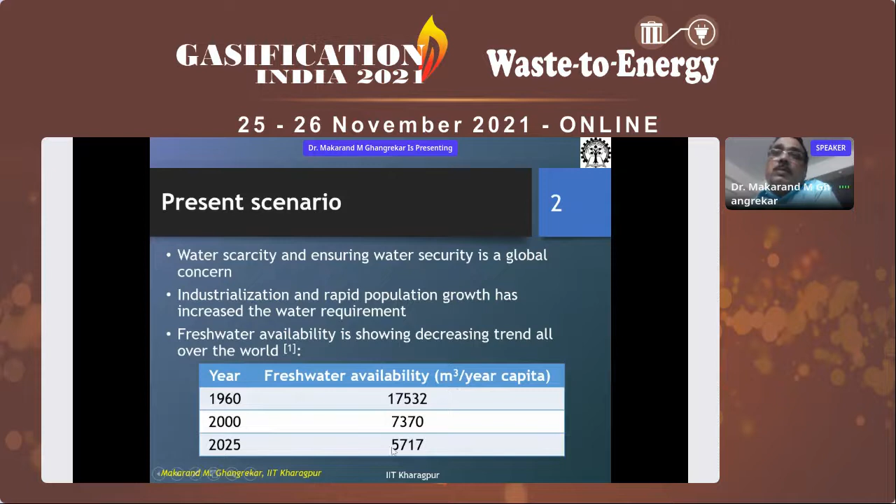Ladies and gentlemen, we are all aware that water scarcity and ensuring water security is a global concern. Our freshwater commodities are getting reduced day by day, and by 2025, we expect that freshwater availability might get reduced to only about 5,700 meter cube per capita. So that is a matter of concern for all of us.

Scientists from their level best are trying to patch up this gap and find out alternative sources of water. Here we consider wastewater as a resource, and if we treat it properly, then we can get assured quality water supply for managing our water demand.

Other than the potable water demand, we can definitely use this water. Even if we treat it properly, as other countries are doing, we can even produce potable quality water out of it, but there may be a social stigma, so I do not want to get into that debate. Certainly, we can produce assured quality treated water for non-potable purposes. For that, whatever primary and secondary treatment we are presently providing, we need to have tertiary treatment in place.

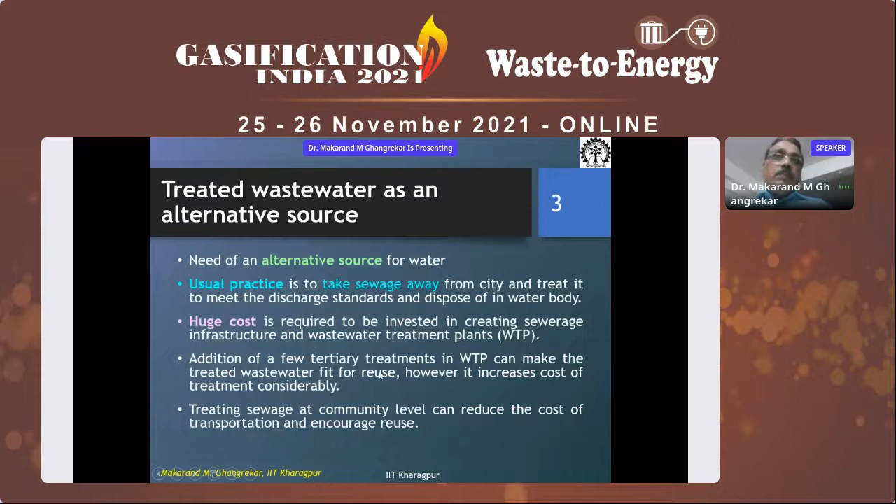Worldwide, RO is being popularly used, but our focus at IIT Kharagpur is to find out alternatives other than RO.

According to the Central Pollution Control Board, about 62,000 million liters of sewage is being generated in this country, out of which only 30% is being treated. Last week, CPCB came up with a fresh report saying that though we have capacity slightly higher than 33% for sewage treatment in this country, only about 18% of the sewage treatment plants are functioning properly. So we really need to look into this scenario and patch up this gap. I'm sure the Government of India is serious about working on this.

When we talk about municipal wastewater, it majorly contains organic matter, nutrients, and suspended solids. So we are right now planning for removal of these three pollutants, majorly, apart from the pathogens which are there.

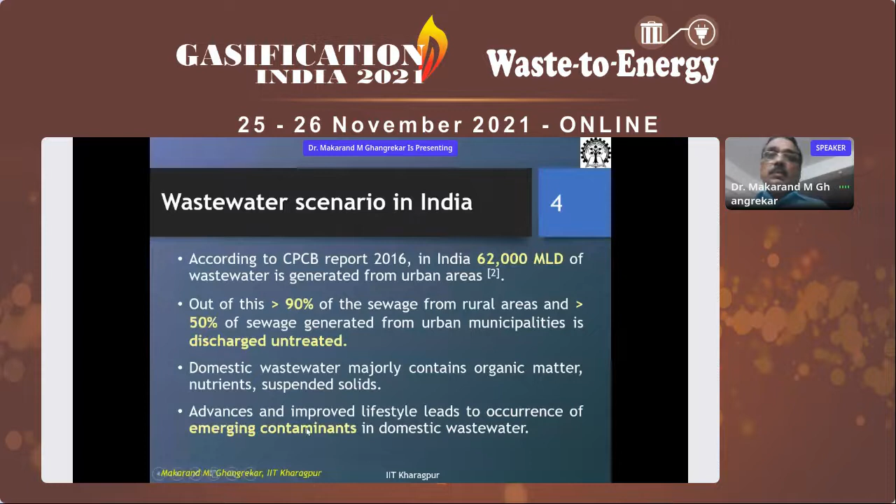However, the concern that is getting shifted now is the presence of emerging contaminants. While utilizing water, we use personal care products. Then antibiotics we consume—about 60% of that goes into human excreta and finally joins the water body. And insecticides and pesticides, though used meagerly in houses, also appear in municipal wastewater during subsequent floor washing. This is a concern because, though at low concentration, many of these compounds are endocrine disrupting compounds, and hence are a matter of concern.

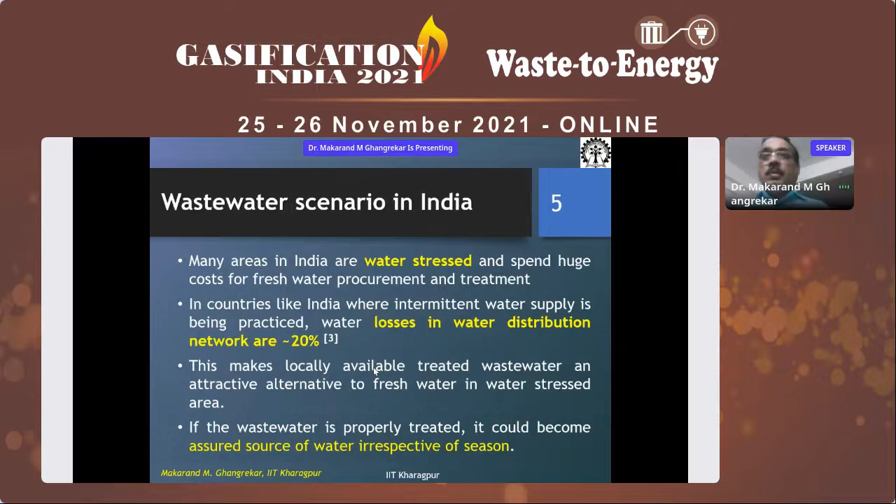We are aware that many areas in India are water stressed and spend huge costs bringing water from larger distances, and during transportation and distribution itself, 20% water loss occurs. So that opens up a window: if localized sewage treatment plants are planned, then we can minimize this transportation cost of water, and assured water will be made available for fulfilling many other non-potable uses in the locality.

Like many cities in summer, we don't have water for maintaining greenery or aesthetic enhancement of the city, and they get dried up. So at least this water can be made available, and for many other uses for that matter.

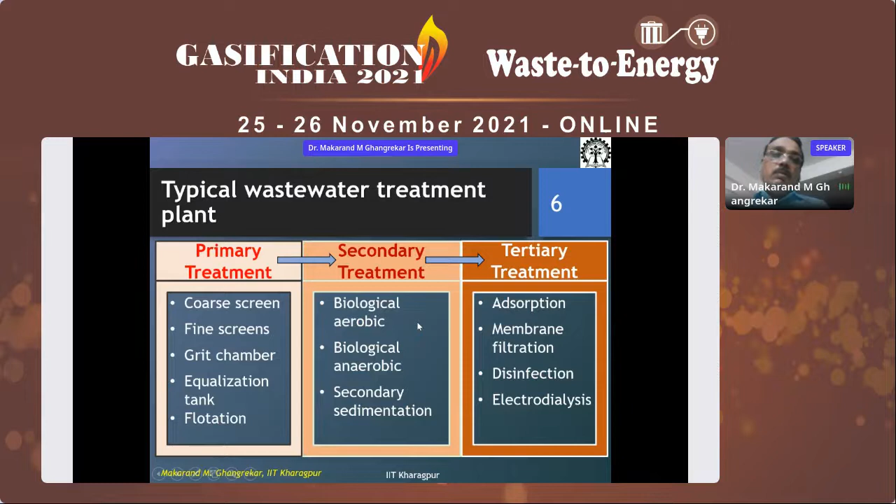A typical wastewater treatment plant comprises primary treatment, secondary treatment, and tertiary treatment. Primary treatment is meant for removal of coarser, settleable, floating and settleable organic as well as inorganic solids. Secondary treatment is meant for removal of colloidal and soluble organic matter. And as per the targeted reuse needs, we need to have a tertiary treatment in place.

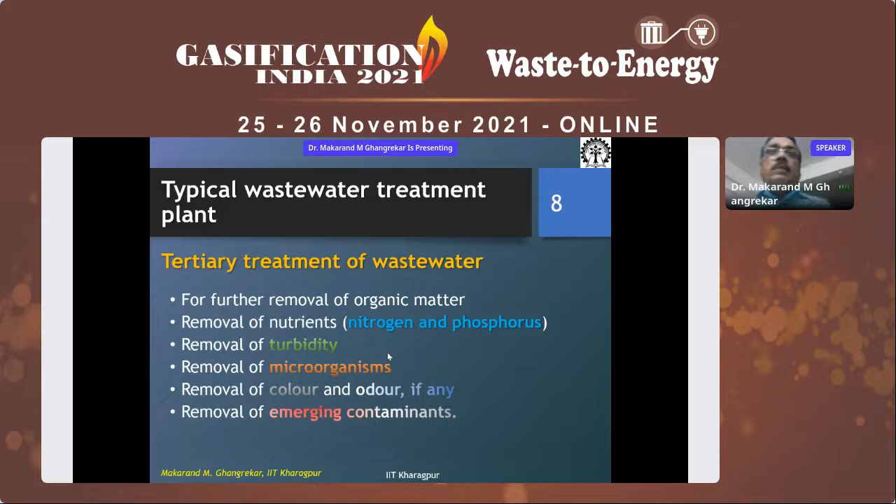Secondary treatment also involves management of the sludge generated in the biological treatment. However, this secondary treated effluent will not be of reusable quality, and it needs further tertiary treatment for removal of organic matter, removal of nutrients such as nitrogen and phosphorus present in municipal wastewater, and further removal of turbidity to increase its visible acceptance.

Secondary treatment contains about 10 raised to power 4 to 10 raised to power 5 coliform number per 100 ml. Part of them are pathogenic, so that needs to be reduced considerably, and fecal coliform should be brought to zero. Then removal of color and odor.

There may be some residual muddy color if organic matter is present in a higher concentration, so that needs to be removed. And because of the presence of organic matter itself, there is odor.

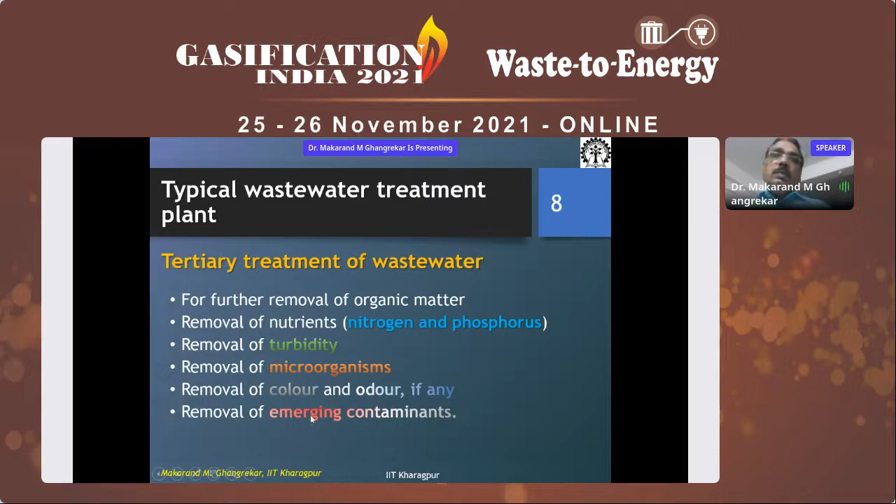And now we are showing concern to manage and get rid of these emerging contaminants. Even at the low concentration of microgram per liter, they have an adverse effect.

In days to come, we are bound to adhere to this standard, so that the water quality in the receiving water body can be protected, and water can be used for recreational purposes. We are aware that many of our river stretches are not even safe for recreation, forget about being accepted for potable purposes. So we need to adhere to these standards in the days to come.

Though they are bringing down BOD to 20 or 30 milligram per liter, even that presence of 20-30 milligram per liter of BOD or 50 to 100 milligram per liter of COD makes water unfit for various other uses. For municipal wastewater, typically the odor can be removed once the organic matter and the sulfur-bearing compounds are removed from that wastewater.

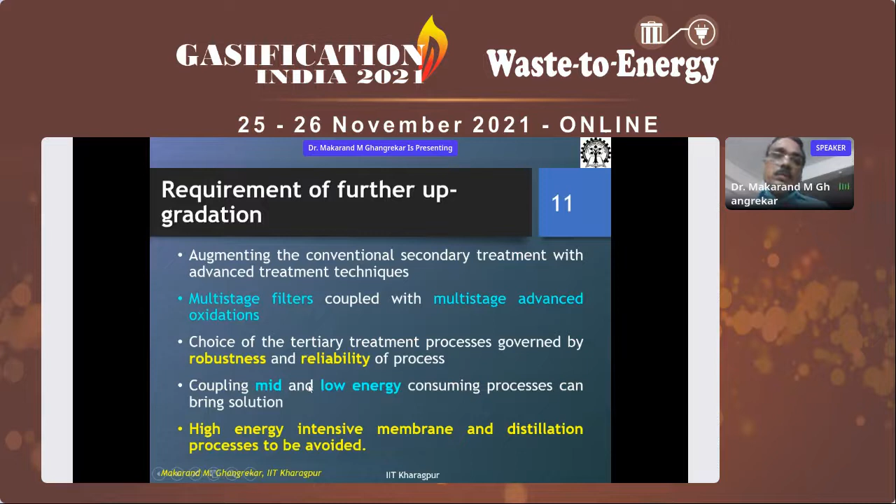So this way, if we produce treated water at 40 rupees cost, there will be less acceptance. Hence our major focus at IIT Kharagpur is to couple mid and low energy consuming devices and processes, so that we are able to produce treated wastewater at affordable cost, imparting sustainability to sewage treatment, so that reusable quality treated water can be produced to reduce the stress on freshwater demand.

In general, what we can explore is an algae-based process, so that harvested algae can be used as a biomass for biofuel production. This is being practiced in many countries at full scale now, and even in India, many are researching, and a few pilots have come up.

We can recover electricity using technology like microbial fuel cells, which I will cover in my follow-up presentation. Sewage sludge can be explored for biochar, hydrochar, or activated carbon production, which can be used back into the process for tertiary treatment, and surplus biochar can be sold for other industrial applications.

We can explore anaerobic treatment technology for methane recovery. The treated water can be explored for aquaculture, which will also fetch additional revenue. Or using concepts like microbial electrosynthesis, there is scope to produce different synthetic compounds.

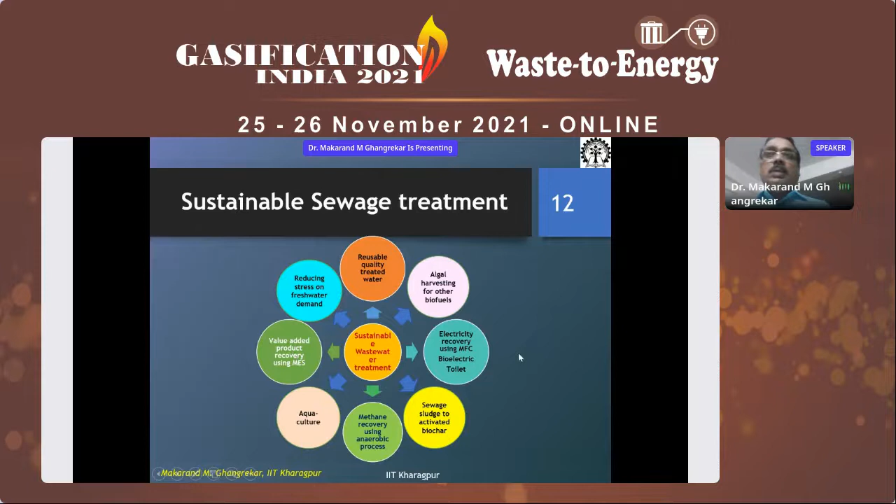As I said in the introduction, these technologies are still at bench scale and will require some time to mature. But scientists are working on it, and I will touch upon this during my follow-up presentation.

From here onward, mostly I will be sharing the work we have done at IIT Kharagpur. We have a UASB-based upflow anaerobic sludge blanket reactor type sewage treatment plant, which I constructed through project funding received from the Department of Science and Technology and the European Union. This is designed for handling 400 cubic meters per day of sewage.

One peculiar characteristic of this UASB reactor, for those aware of it, is that while treating low strength wastewater, granulation of biomass is difficult to obtain. Whereas our UASB reactor treats sewage generated on campus, where per capita water use is much more and the sewage is diluted, with average COD of 222 to 230 milligrams per liter. Even treating such low strength wastewater, we have two-thirds of the biomass present in the UASB reactor as granular biomass. That is one indication of successful operation of the UASB reactor.

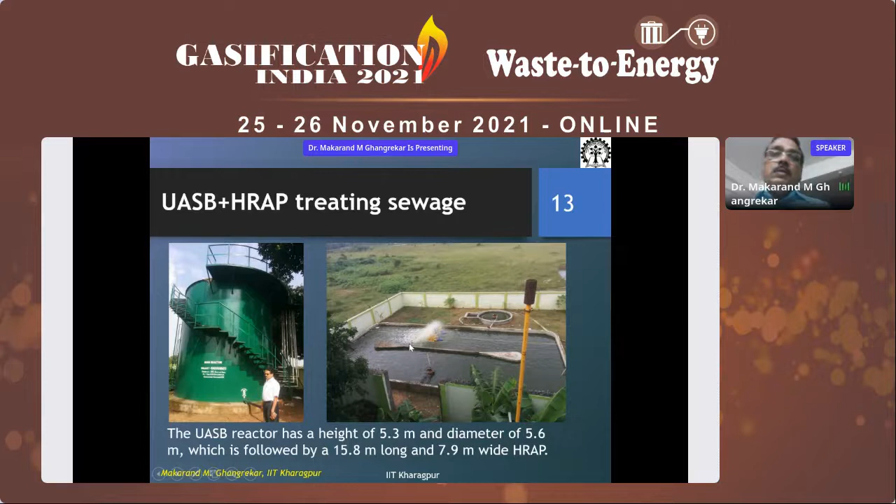After the UASB reactor, the effluent is treated in a high rate algal pond. The high rate algal pond produces synthesized algae, and that harvested algae can be used as a feedstock for biofuels. These are still on an experimental basis, and we are exploring different value-added products recovery at IIT Kharagpur.

So this is the performance of the UASB reactor. When we commissioned it, unfortunately we started in the winter, so it took a longer time for commissioning. But 2 to 3 months of commissioning time is normal even in summer.

If we start to build up the necessary biomass inside the UASB reactor, it takes about 2 to 3 months. In our case, it took more than 4 months, and once it stabilized, it started giving 70% removal efficiency for total COD, and even in peak summer, we could touch upon a few days even above 80% COD removal efficiency.

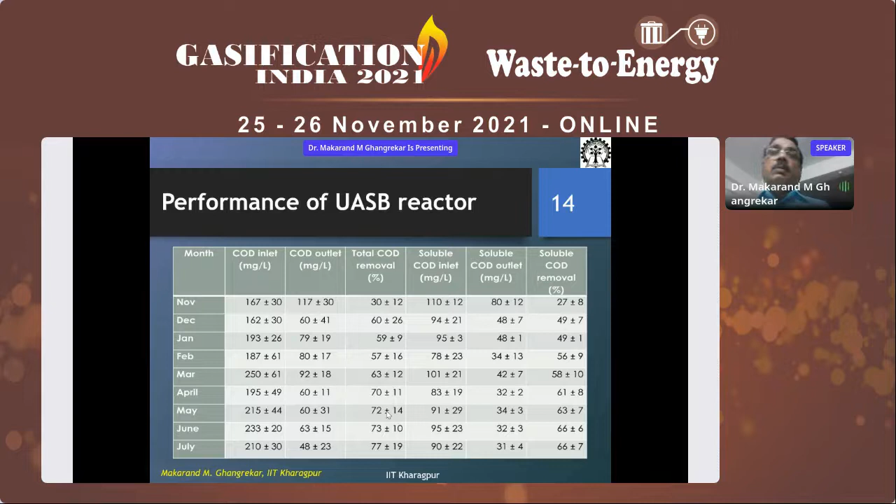In India, we have about 40 plus UASB reactors treating sewage, and most of them are struggling to give COD removal of about 60-65%, with BOD removal around 75%. Our plant is giving more than 80% BOD removal, and even in winter, the total COD removal is somewhere around 68 to 70%. This is possible because of proper design and biomass granulation in the UASB reactor.

In a way, we are able to recover methane, but right now we are not utilizing it - we are still working on it. This plant has been in operation for 4 years. I'm trying to catch hold of some partner who can really utilize that methane, at a low scale of 30 cubic meters per day, for beneficial use. Right now, we are only flaring it with the flare stack. But still, we don't have to spend energy for the treatment of wastewater, and that makes this treatment economical.

The role of the high rate algal pond is to further give polishing treatment for organic matter removal and remove nitrogen and phosphorus, which the UASB reactor, being anaerobic, fails to do. It also contributes to reduction of pathogens.

It produces effluent with removal of 85% of nitrogen, more than 90% phosphorus, and 2 to 3 log scale reduction in pathogens. It produces effluent with less than 30 milligrams per liter of BOD, COD around 80 milligrams per liter, and pathogens around 600 MPN per 100 ml.

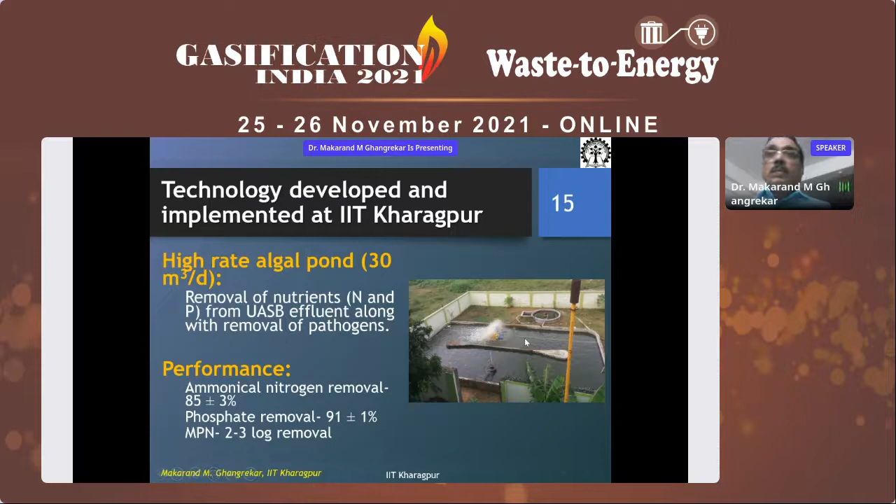So this water is suitable to be used for restricted irrigation, meaning where human beings are not supposed to be in contact. It can be used, but it cannot be used for contact irrigation purposes, such as sprinkling lawns, where people movement could occur. So then we modified the design.

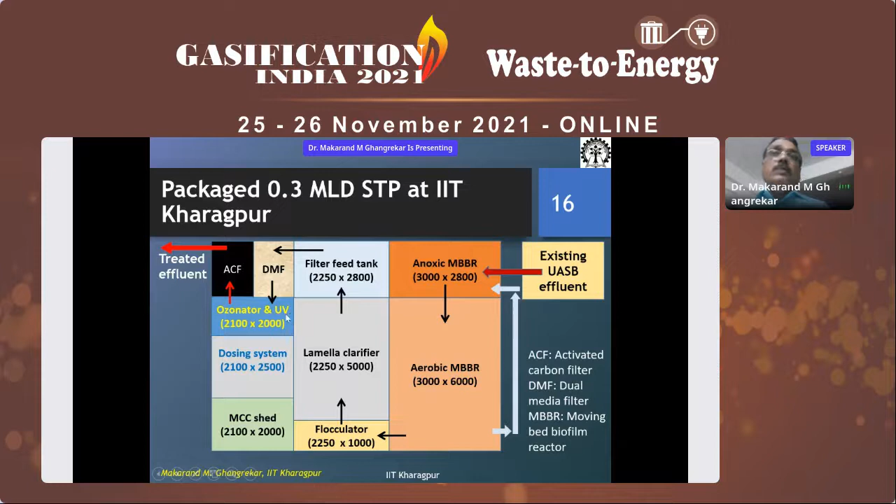To give polishing treatment, we set up about a 300 cubic meter capacity per day modular sewage treatment plant comprising a moving bed biofilm reactor, anoxic and aerobic, so that the combination can remove nitrogen, then a lamella clarifier, then a dual media filter, followed by three-stage disinfection comprising ozonation, ultraviolet disinfection, as well as chlorination as per the need. The final effluent is passed through an activated carbon filter to remove any disinfection byproducts that are formed.

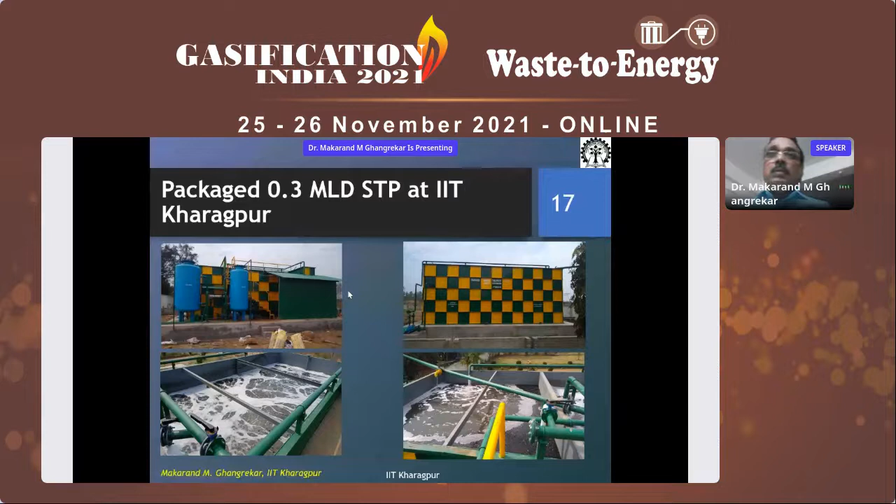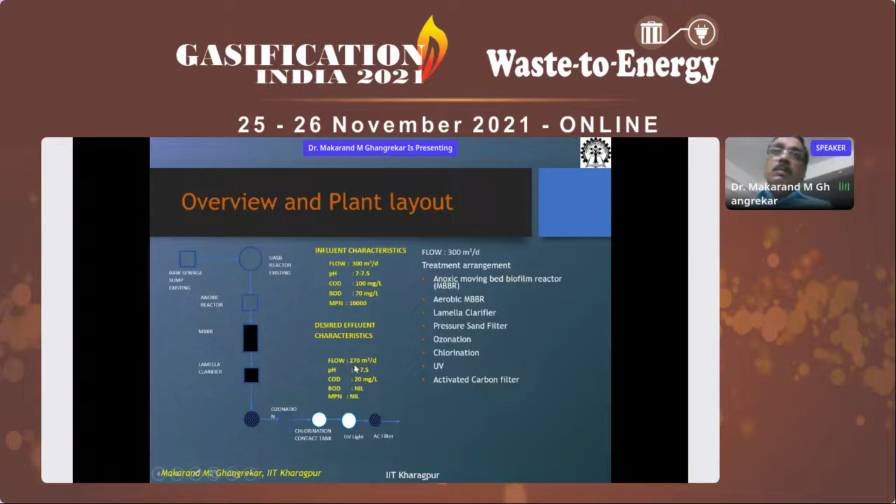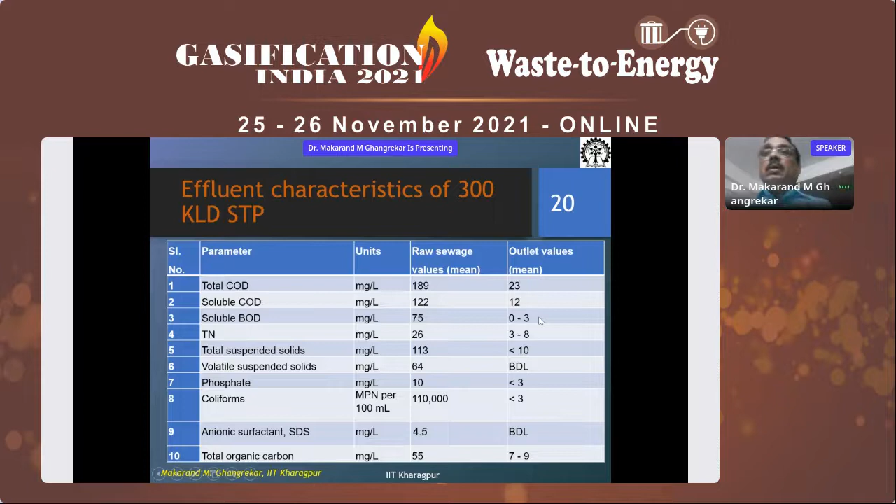So this water is really safe, and this quality is much better than the water quality available in many natural river stretches, which we are accepting as raw water for potability purposes. So this concept we further...

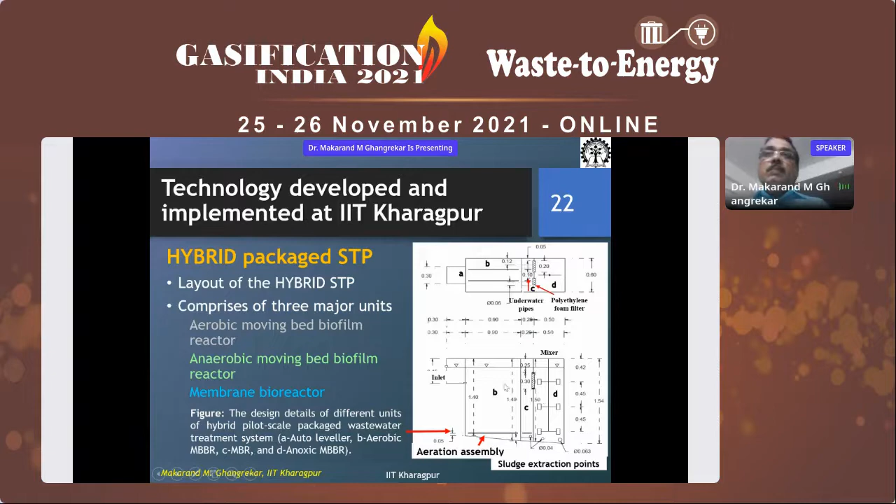Moved it to the package treatment plant of 3 cubic meter per day. Instead of the lamella clarifier, which is bulky, we replaced it with a membrane bioreactor. So it's a combination of aerobic MBBR, anaerobic MBBR, and membrane bioreactor. This compact module that we prepared also gives more than 90% COD removal efficiency, close to 96% BOD removal efficiency, and even total nitrogen removal efficiency around 80%.

MPN without disinfection is brought down to less than 300 MPN coliform per 100 ml, and even surfactant removal is effective. So this package treatment plant is also effective to produce treated sewage meeting the NGT recommendation. But if we want to reuse it for human contact purposes, some moderate disinfection by addition of bleaching powder can be done to produce water safe to be used in horticulture.

This is the costing of this plant. This package plant of 3 cubic meter capacity took 2.16 lakhs as capital investment. Operating cost is 5.6 rupees, and considering 15 years life of the reactor, the capitalized operating cost comes around capex of 21 rupees per kiloliter. So because of the smaller size, it is a little costly.

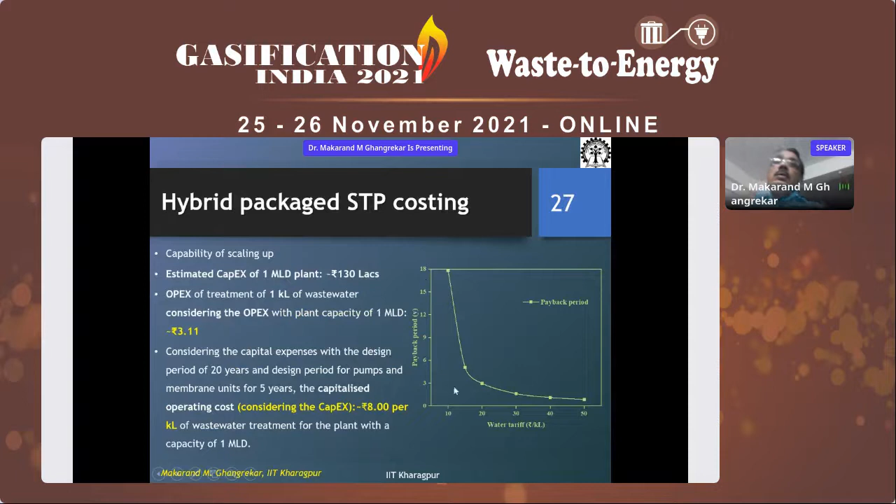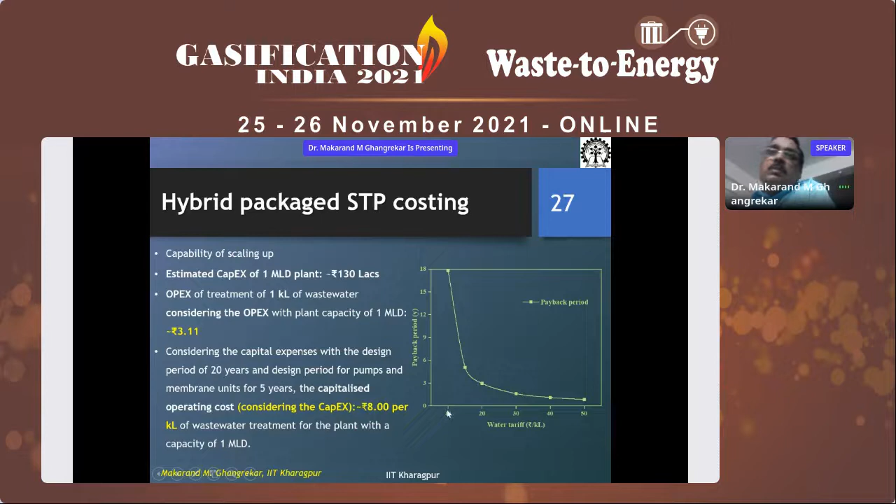The return of revenue also depends upon the water tariff. Obviously, if the water rates, as in many metro cities in India, are more than 15 rupees per kiloliter, there is definitely a revenue return. But if it is less than 10, then obviously there is no benefit if the water charges are less than 10 rupees per kiloliter.

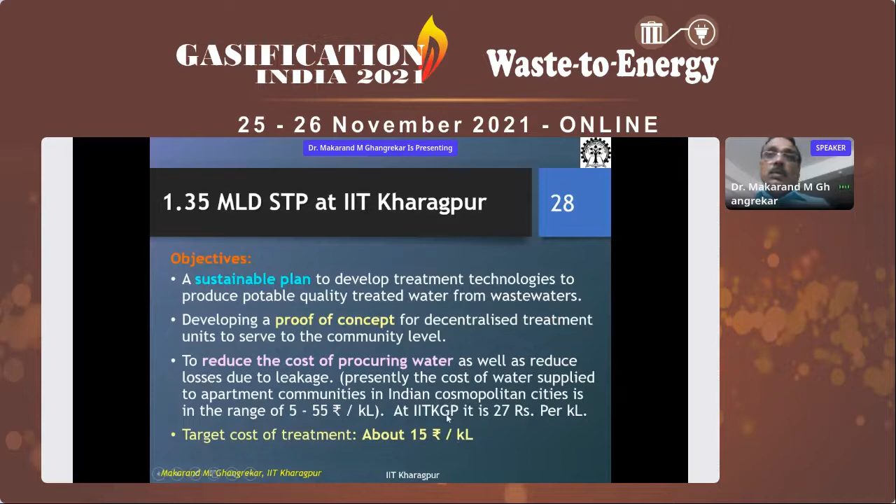We extended this concept on campus to a 1.35 MLD sewage treatment plant to manage the wastewater generated from the hostels. The target cost that our institute authority gave us is 15 rupees per kiloliter. And these are the plans.

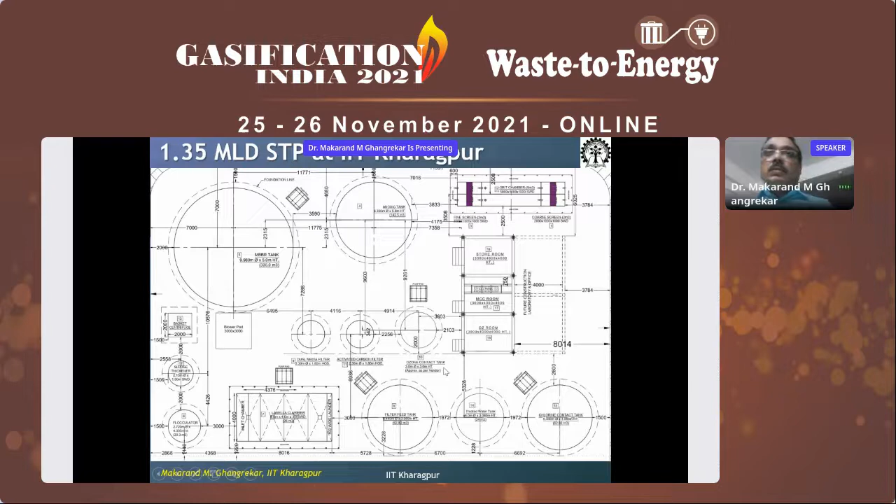After screen grit, we have anaerobic MBBR, aerobic MBBR, then lamella clarifier, dual media filter. Then it goes to the disinfection tank where we have arrangements for ozonation and chlorination. UV we have avoided because from the 300 cubic meter plant we found that UV is not playing much role. So ozonation and chlorination are better.

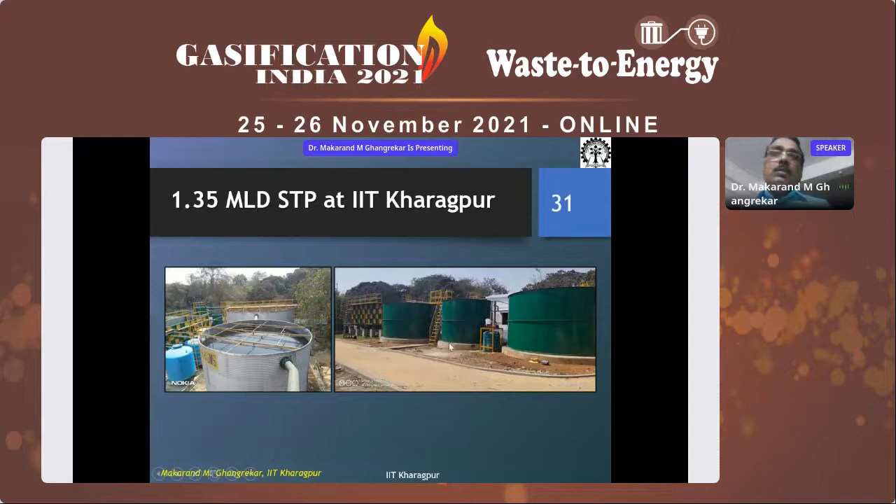This is the photograph during construction, and this is the photograph when the plant construction is complete and put into operation since September 2020. Since then, the plant performance is still improving. This is at the end of October.

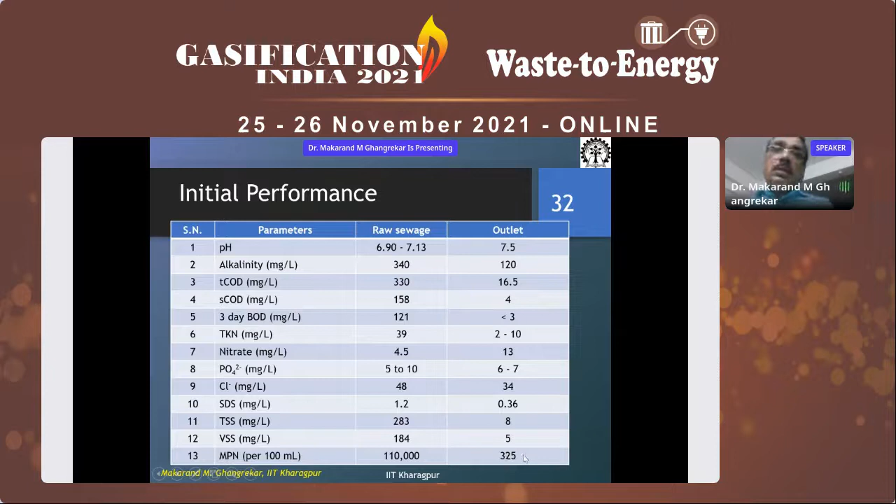Right now we are only dosing ozone, so we are experimenting with ozone. With addition of chlorine, this 300 MPN issue could also be solved.

We then estimated life cycle costing for 300 cubic meter and 1350 cubic meter capacity treatment plants. The cases considered: Case 1 is secondary treatment up to the clarifier. Case 2 adds tertiary treatment with ozonation. Case 3 is ozonation followed by chlorination. Case 4 is chlorination followed by UV, since the presence of chlorine in UV generates more radicals and is more effective in removing some xenobiotic compounds. Case 5 is all of these in place together: ozonation, chlorination, and UV.

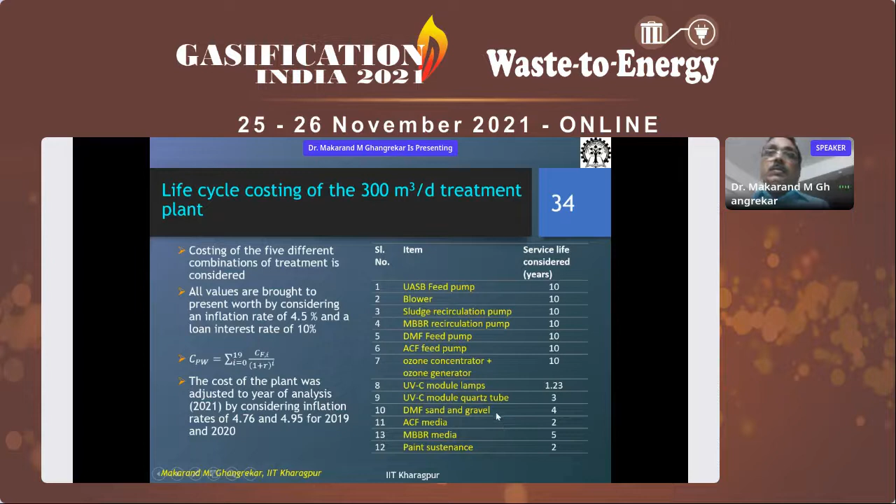I'm not going to go into detail, but what's important is this: the life cycle costing tells us that with only secondary treatment in place, the major cost is operation, i.e. manpower cost, followed by the capital component, then energy cost. Whereas with tertiary treatment in place, energy cost booms to about 40%, manpower cost is 30%, and capital cost is slightly less than 30%. The remaining cost is operation and maintenance, including routine O&M, analysis cost, third-party analysis cost, and contractor profits.

So here are the numbers. For the 300 cubic meter capacity plant, considering the installed capacity of electrical components like aerators and pumps, our treated water cost comes to about 16 rupees per kiloliter, because of the small size. When we extend the same to 1350 cubic meters, we are able to produce water for less than 11 rupees per kiloliter, and this water quality is really safe.

I'm not saying it's for potable purposes, because it still contains traces of antibiotics, and hence as a scientist I cannot certify it as potable water. But I can certify that if anybody by mistake drinks that water, nothing will happen immediately. However, long-term exposure is not good because of the traces of antibiotics present.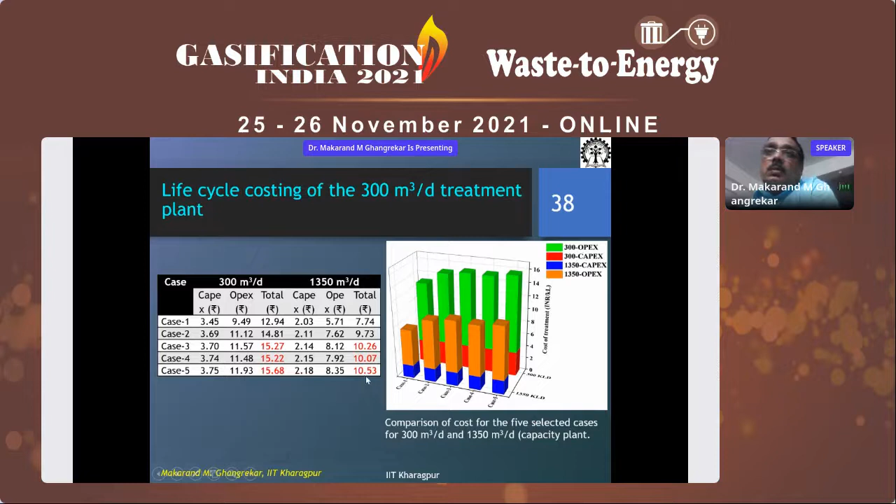Now I will start on our research work on bioelectrochemical processes. For those who are aware, this may repeat, but for those who are new: a microbial fuel cell traditionally consists of two chambers, anodic and cathodic, where respective electrodes are housed. In the anodic chamber, the wastewater to be treated is admitted, and the anode provides the surface over which electrogenic bacteria will grow.

The electrogenic bacteria, when in contact with organic matter, oxidize it and generate electrons and protons. These electrons travel through the external circuit, over which the device we want to power is attached, and through this circuit they travel toward the cathode. The membrane separating the two chambers is traditionally a proton exchange membrane, PEM, which allows only protons to pass through toward the cathode. It should not allow oxygen, since the cathodic chamber is typically aerated.

The PEM should not allow oxygen to cross over, otherwise it will directly consume organic matter for aerobic oxidation. Also, it should not allow substrate to pass over to the cathodic chamber. Those are the expected properties of the PEM. Nafion or Ultrex are the popularly used PEMs.

In this way, the organic matter containing wastewater works as a fuel, and in turn we are able to recover electricity for certain on-site applications. Depending on the calorific value of the fuel, since wastewater is a low calorie material, the electricity harvested is low, and it can only be exploited for powering low power devices such as mobile charging or LED bulb charging, and similar low-demand electrical appliances.

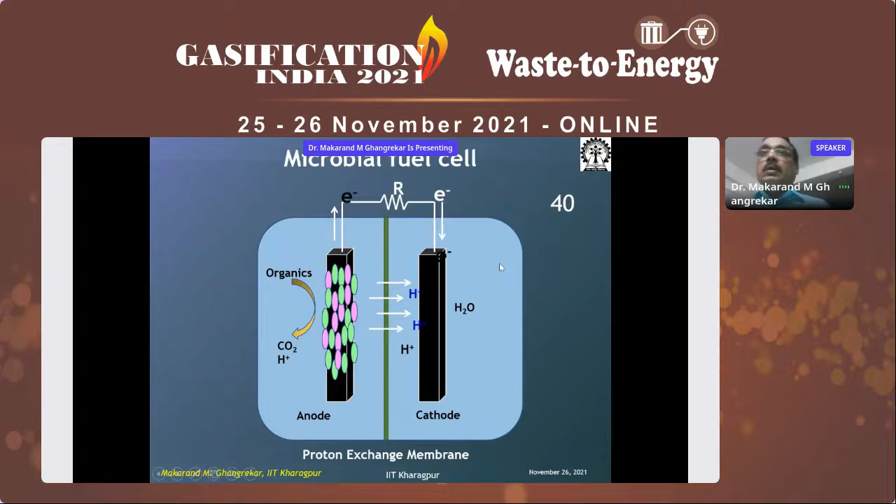So bioelectrochemical system is a general umbrella term. The advantages of BES are as a sustainable green technology for wastewater treatment and generating electricity without any noise and without additional pollution. Rather, it is carbon neutral because we are not using any fossil fuel; we generate electricity using organic waste, converting the chemical energy stored in the chemical bonds of organic matter into electricity.

It has high energy conversion efficiency expected from bacterial mediated reactions, though in reality this is a challenge. We are not getting more than 40% conversion efficiency, while in small lab scale controlled reactors, conversion efficiency may go up to 80%. So electrochemistry and related aspects remain a challenge, and scientists are working on it.

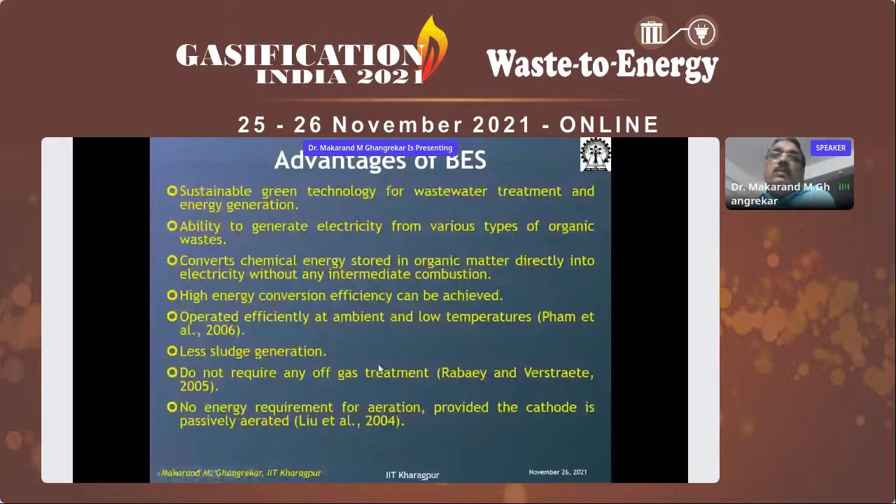Operated efficiently at ambient as well as low temperature, with less sludge production, so excess biomass generation is less. It does not require any off-gas treatment, and no energy requirement for aeration as required in conventional MFC if the cathode is made as an air-breathing cathode.

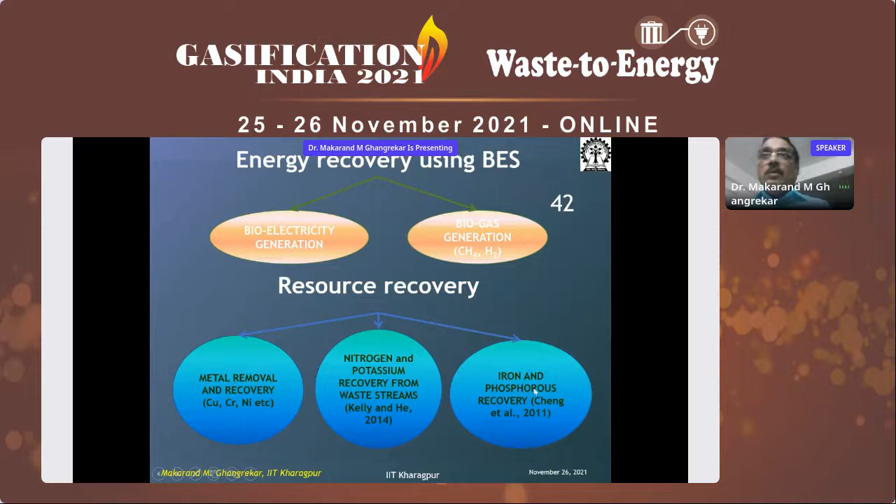It can be exploited for bioelectricity recovery, and for biogas and hydrogen recovery. So we can configure the system to get hydrogen by imposing potential on the cathode. Even methane can be recovered. Then it can be used for metal recovery, nutrient recovery, and even phosphorus and iron recovery, as reported by Cheng et al.

However, there are bottlenecks and challenges since the bacterial mediated electrochemical reactions make electrochemical losses unavoidable. There is activation loss, concentration polarization loss, and ohmic loss while the charge is getting transmitted through the medium. So we need to minimize this as much as we can so that the maximum energy output can be obtained.

Scaling up is a typical challenge because a single MFC, even using the best configuration, can maximum generate 0.6 to 0.7 volt, because theoretical voltage is 1.1 volt, and these losses put together, depending upon the properties of the material components used, will contribute about 0.3 to 0.4 voltage lost in the process. So 0.6 to 0.7 volt by a single MFC.

So we need multiple MFC in a stack. Then there are challenges because of the stack, because of the reversal of polarization potential, which will impose adverse potential on each other. So these are all challenges of operating this system.

Expensive electrode accessories and costly separators, the Nafion and Ultrex, which I was telling about. The Nafion costs typically about 1,800 US dollars per meter square. So that is where it hinders the cost, and the production cost of this device will be tenfold compared to conventional wastewater treatment technology.

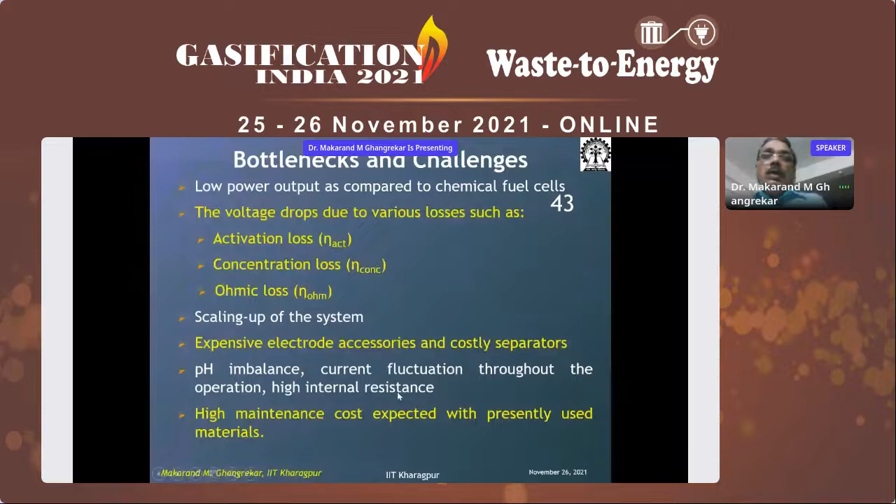Then pH imbalance, like any other biological reactor, is an issue. Current fluctuation will also be an issue. High maintenance cost is expected for this reactor, which could also be a challenge because of the costly components involved.

However, it has various applications in the field of life sciences. One of the applications is, of course, wastewater treatment. It can be used as a BOD sensor. This has already been commercially marketed as an MFC-based BOD sensor.

It can be used for removal of hydrocarbons from polluted sediments. So you insert the anode in the deep polluted sediment, and have a cathode on the surface of the polluted water body, so that in situ remediation of the sediment can happen.

It can be used for generation of power from sediment MFC. This is actually working in Europe now, where they use it for powering environmental sensors in the deep sea. They are utilizing this power with MFC-based sensors, and we experimented at IIT Kharagpur in the aquaculture experimentation pond.

So we installed the anode in the sediments and cathode in the overlaying liquid, and in situ remediation of the aquaculture water without external recycling was feasible, and the water quality could be maintained for long to get the desired success in fish yield in the aquaculture pond.

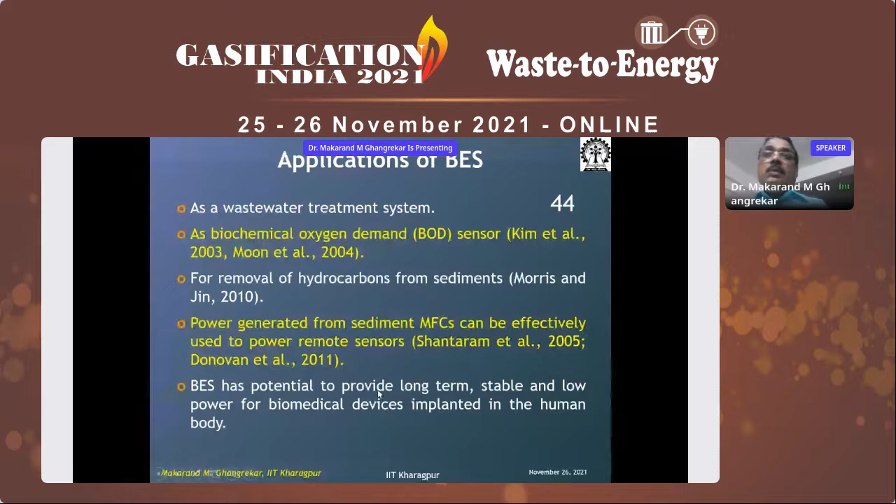BES has the potential to provide long-term, stable, and low power for biomedical devices that we implant in the human body, and even in robots, so that the robot will feel itself when the potential goes down. It can feel that it is hungry and it will eat the sugar cube and power itself.

So that way it can be exploited. It can be used for rapid detection of food contamination. It can be used for sludge degradation.

Our experience in our lab tells us that the MFC based sludge digester requires half of the time required for the anaerobic digester.

It could be used for simultaneous secondary and tertiary treatment of the wastewater - organic matter removal as well as desalination. If we configure the system, that also I will share. So simultaneous wastewater treatment and desalination is possible.

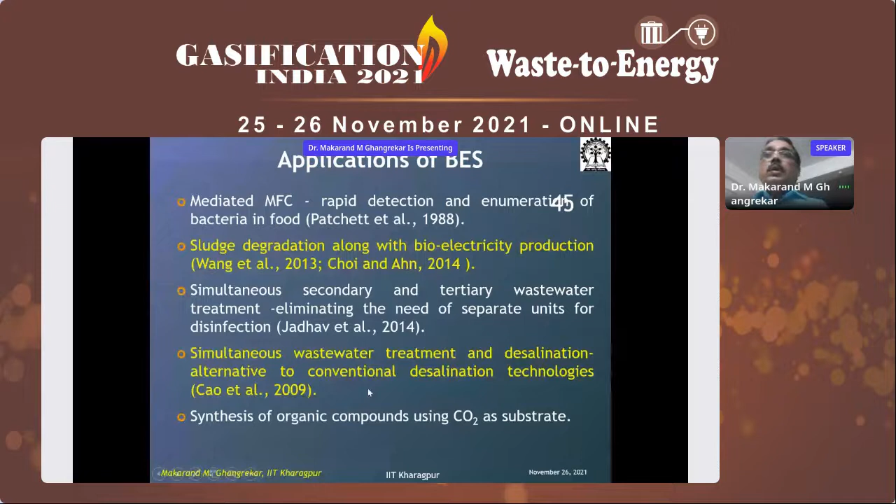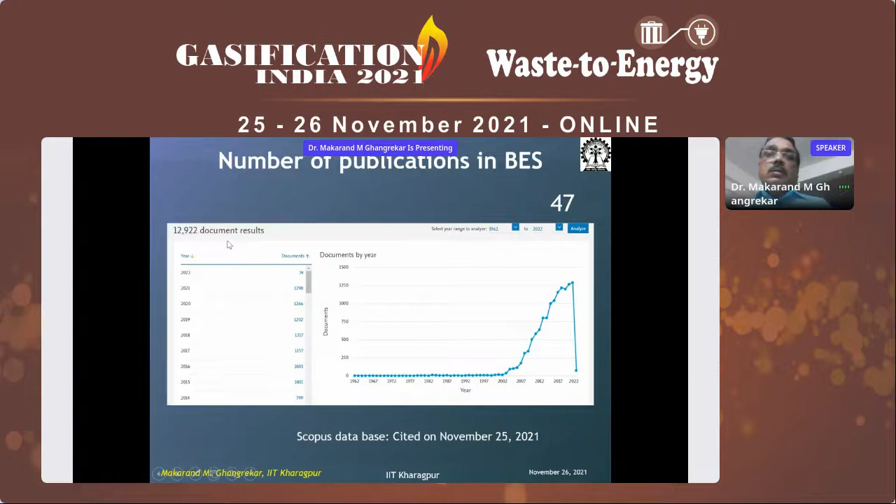This will tell you how scientists are paying attention. When we started research in 2004 at IIT Kharagpur, there were only 21 papers available. At this stage we jumped in, and right now nearly 13,000 publications are available addressing different issues, and this is where we are in this domain of microbial fuel cell research.

We are second all over the world, from our group, after Logan from Penn State University, USA, and then these people from UK, and then again Canada and Chinese people.

Institute wise, we are in the fifth rank for contribution in this domain out of nearly 13,000 to 30,000 papers. We could contribute from IIT Kharagpur more than 200 articles addressing different issues of microbial fuel cell.

Based upon a decade of experience working on different components, we could come up with a 1,500 liter capacity on-site sewage treatment facility. We named it the bioelectric toilet - there is a toilet and there is an MFC-based treatment system.

This comprises a central chamber. This photograph shows it in the horizontal to imagine it better, but in reality it is placed vertical like this. It consists of a central chamber where the waste from the toilet comes in, and then the liquid flows through this peripheral six chamber.

This peripheral chamber contributes further polishing treatment. Half of the liquid flows anti-clockwise, half flows clockwise, and finally it comes to the final chamber where it is operated as an aqueous cathode along with the central inlet chamber.

And we are dosing hypochlorite here - you can see this hypochlorite dosing arrangement, and that generates the treated water. So as and when the toilet is flushed, the waste comes in, and then it gets treated in this chamber within a retention time of a day or day and a half.

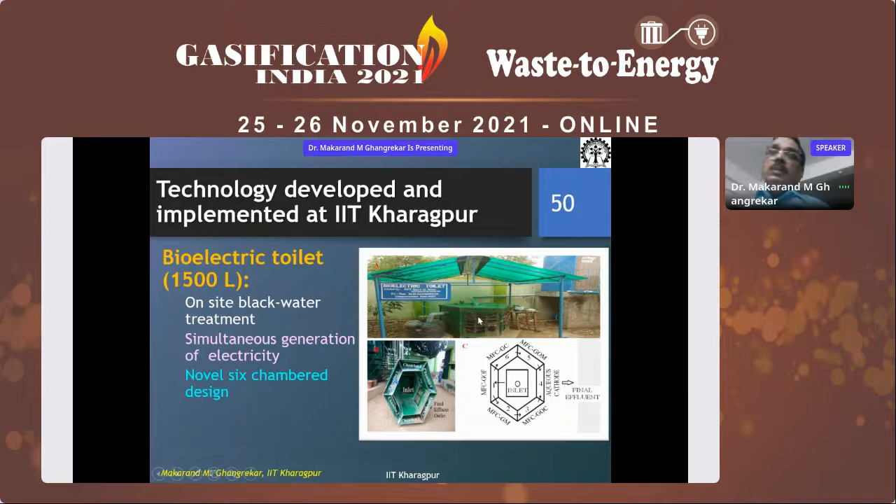So 1 to 2 days retention time, same as the septic tank. But we are able to produce treated water which is safe to be reused for any purpose.

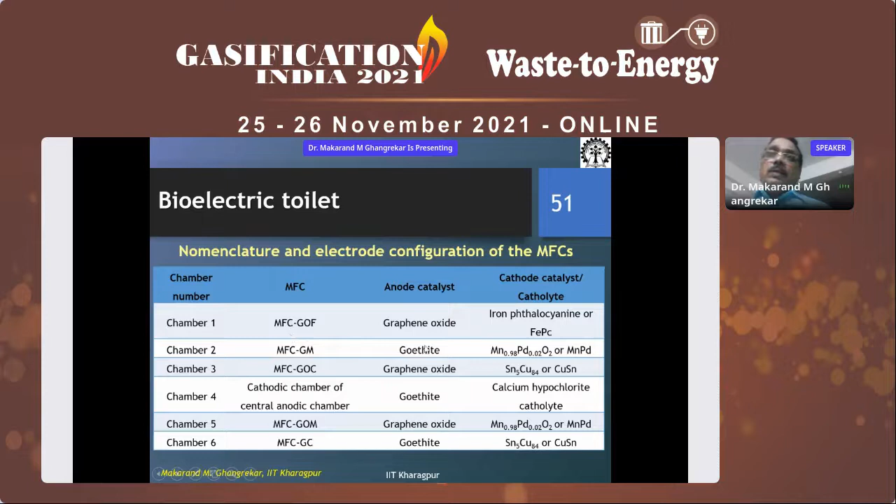Of course, from an electrochemistry point of view, we have used a different catalyst to gain the advantage of better anode potential as well as cathode potential. But these are all low cost materials that we have used.

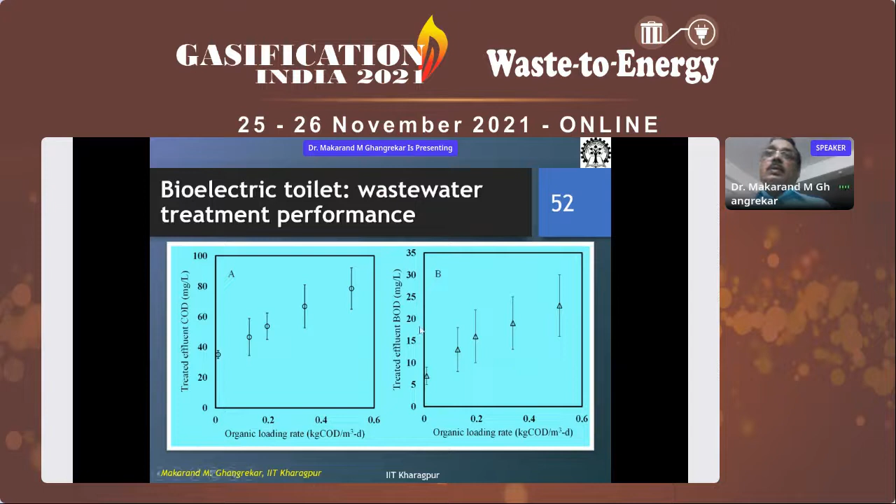This is the performance under different flow rates that we operated. We found that when it is operated for less than 0.5 kg of COD per meter cube per day, we get treated effluent with less than 20 milligram per liter of BOD.

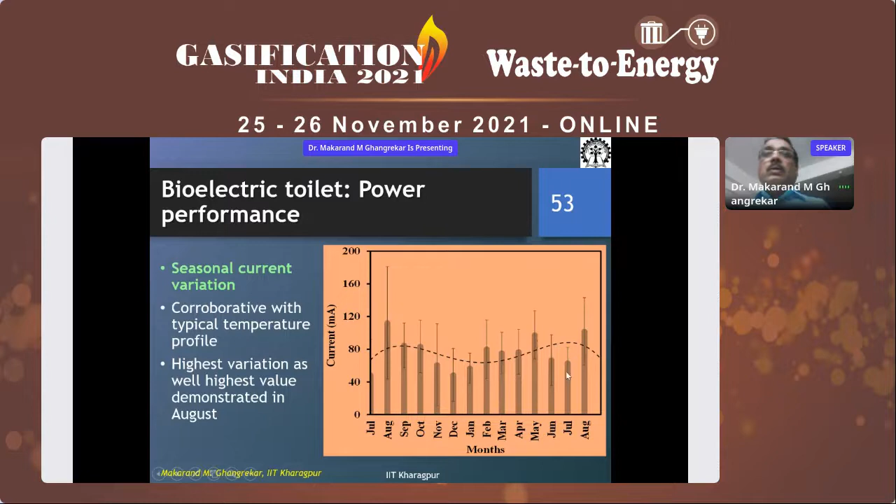This is the variation it has shown over the seasonal variation. Obviously in the winter, the biochemical reaction rate lowers down and its performance slightly drops. In summer or any hot weather, we definitely get much better performance.

Then this electricity - okay, this is the treated water characteristics. Average BOD is around 23 plus or minus 7. COD is less than 80, and MPN is less than 100 MPN per 100 ml.

So this water is suitable to be reused back in the toilet for flushing. Using a solar power pump, we are pumping it to the elevated reservoir over the toilet.

The concept is for a remote area where people are reluctant to use toilets because of the filthy nature of the toilet. If we make this kind of arrangement, once the overhead tank is filled, then every time people do not have to carry huge quantities of water for flushing the toilet as well.

They have to carry only 1.5 liter for cleaning purpose, and when the toilet is flushed on site, this gets treated, and the solar power pump pumps it. In the process, the evaporation loss that happens gets compensated because in India we use water for cleaning - every use of the toilet is about a liter of water. That will compensate the evaporation loss.

So this way it's a perpetual water use toilet - free from any external supply of water, free from any external supply of electric grid, and in the process we are generating electricity. That is the biggest advantage - that electricity can be used for illuminating the toilet premises and cabin at night.

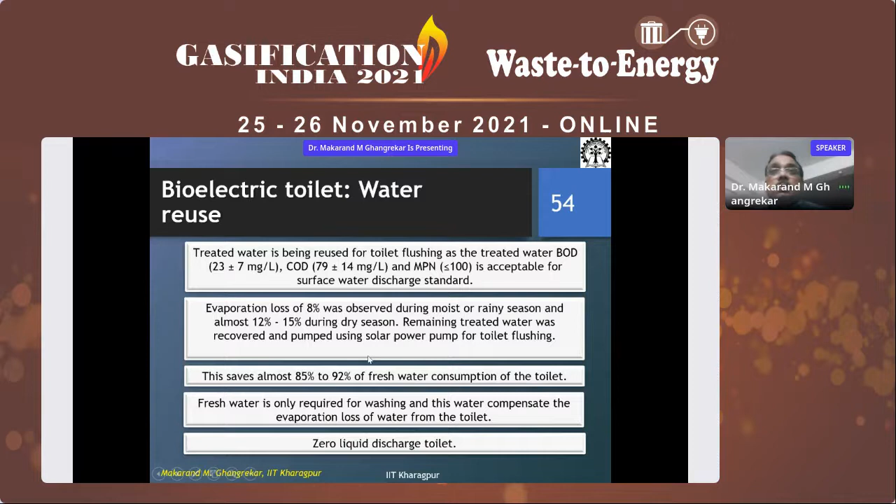Also, the smell problem near the toilet is eliminated because using this bioelectrochemical system, the ammonia is getting oxidized.

Bioelectrochemically, ammonia is converted to nitrogen, so there is no smell issue, and sulfide is also getting oxidized to elemental sulfur. Our students work whole day near this toilet, so there's no smell issue there. The sludge also has better characteristics - C by N ratio close to 20 is needed, and we're getting around 18. The sludge has good value, and we are further characterizing it for presence of pathogens. Upon drying, it can be used as a soil conditioning agent.

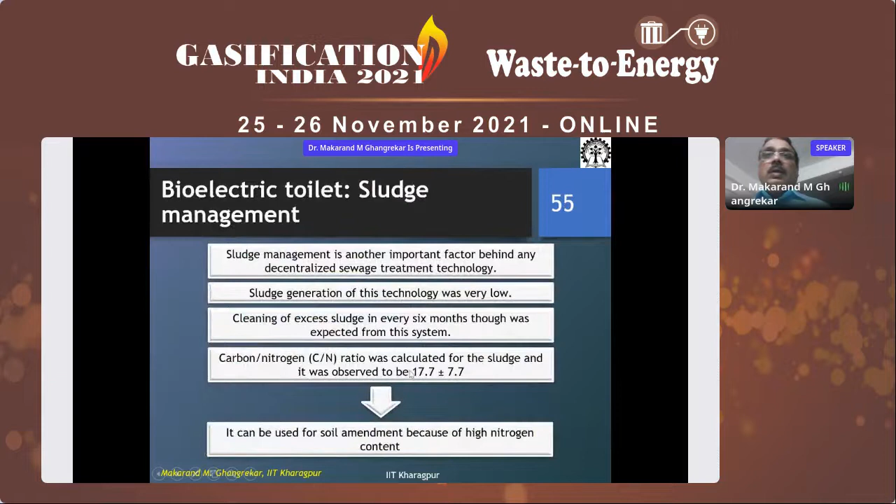So that way this technology can work, but the only thing is the cost. This FRP based system costs about 2 lakhs, but when we make it with the ceramic cylinder, it costs only about 40,000. But then the drawback is the brittle nature - by any chance if anything strikes, the cylinder may get broken. So it needs to be properly protected from animal attacks - dogs or cats should not jump on it.

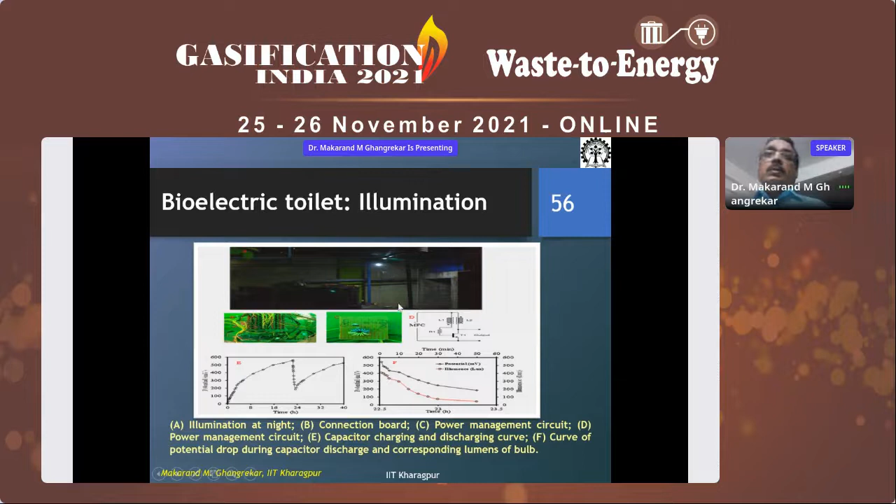This is the electrical circuit with 500 farad, four capacitors that we use to store the power. When required, when the bulb is turned on, these capacitors get removed from the charging phase, and then in series they start discharging, generating adequate power to illuminate these LED bulbs outside and inside the premises of the toilet.

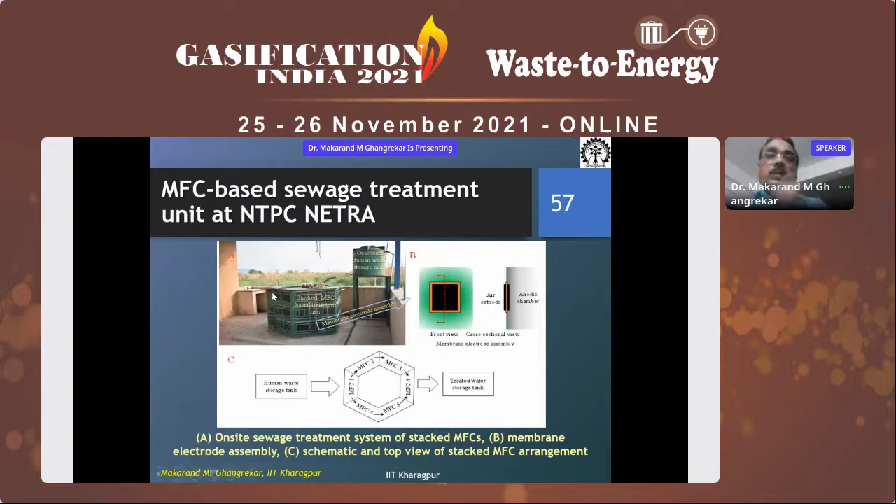Looking at this success, NTPC Netra campus, Greater Noida contacted us to replicate this, and we installed it at their guest house in the Greater Noida campus of NTPC for treatment of wastewater generated from their guest house. There we saw successful operation also, for nearly 1.5 years we operated using different catalysts on the electrodes. But the wastewater has very strong characteristics - because only on-site generated sewage was used, we got exorbitantly high COD.

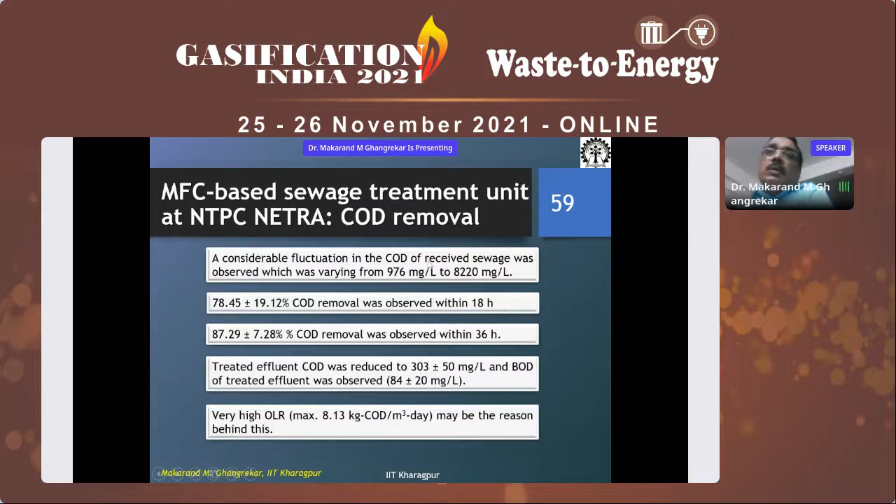Though it still handled giving about 80% COD removal efficiency, it produced effluent with 300 milligram per liter of COD, so further polishing treatment is required for facilitating reuse. But if the inlet is diluted, then obviously these values can also be diluted, and reusable quality treated water can be produced.

As I was telling, these microbial cells could be configured as a microbial desalination cell, facilitating electricity harvesting as well as TDS removal - desalination. So instead of two chambers, now we can make it a three chamber arrangement. Here the organic content in the wastewater can be oxidized, and in the central chamber we can have saline water admitted for desalination, or the same wastewater if we want to desalinate. Because of the charge difference, anions will migrate towards the anode, cations will migrate towards the cathode, and this way desalination of water can also be achieved.

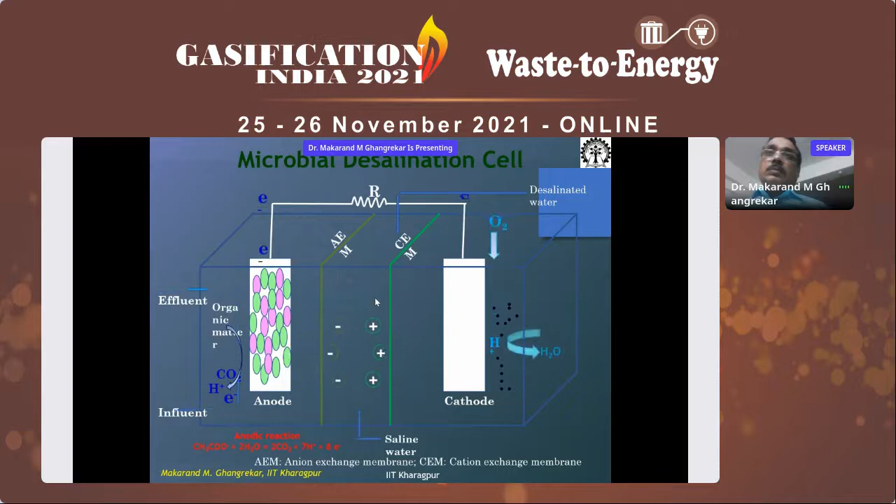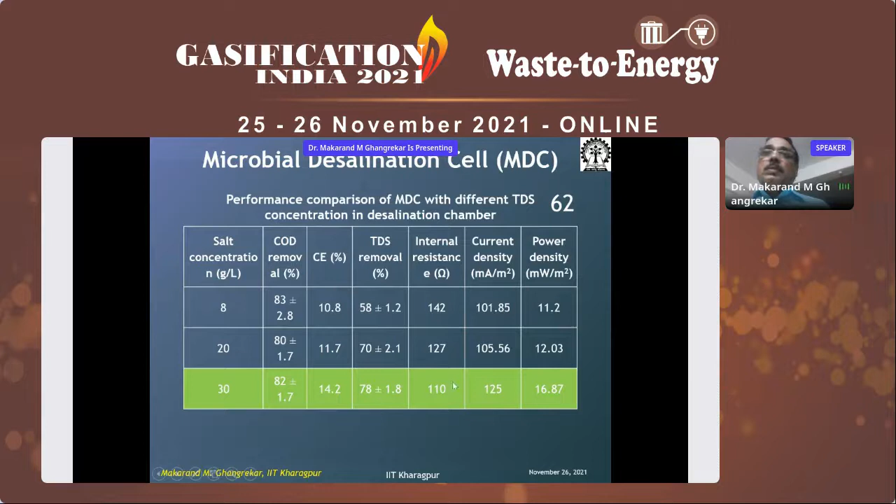We had a project sponsored by Tata Steel, Jamshedpur to treat their wastewater using a three chamber desalination cell. We operated and evaluated performance with different salt concentrations - with higher salt concentration, the internal resistance of the system reduces, giving better performance. For their industrial wastewater containing phenolic compounds, which are not easy to degrade, we could still get above 80% removal efficiency, Coulombic efficiency (electricity harvesting efficiency) about 14%, salt removal 78%, and power generation around 17 milliwatt per meter square.

Microbial electrochemical systems could also be configured as a microbial electrosynthesis system. Instead of harvesting electricity, if we impose about 0.5 to 1 volt on the cathode, then using carbon dioxide as a carbon source, there is opportunity to synthesize organic compounds. So it can work as a carbon sequestration system.

Our target here is the biogas that we generate. We wanted to pass biogas through this cathodic chamber, so that the carbon dioxide from this biogas could be captured and converted into valuable products - organic chemicals.

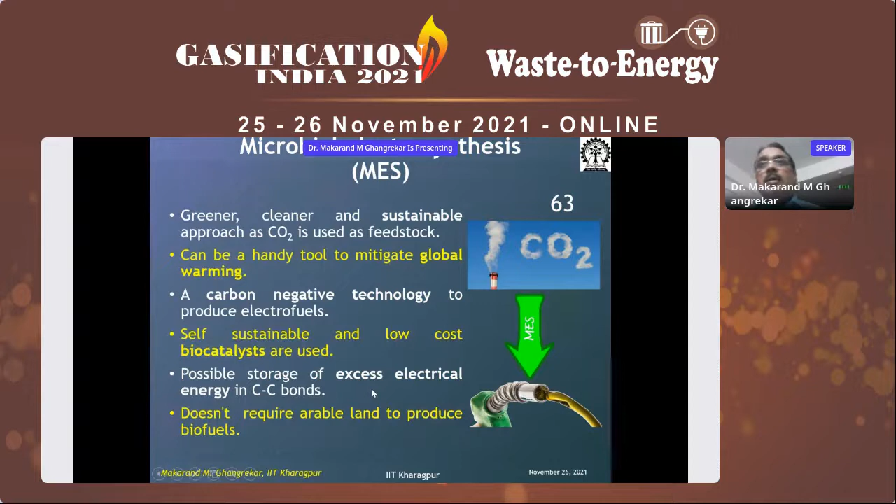This way, biogas reforming also means enriching biogas in methane content can also be possible. So if we synthesize chemicals, it does not require any arable land to produce biofuel, and we are able to produce fuel or any synthetic chemicals as per our need, and as per the imposed potential or the catalyst that we are using on the cathode.

So the philosophy is simple: CO2 to other hydrocarbon compounds cannot happen as a spontaneous reaction, and to make that reaction happen we need to impose potential. Using acetogenic bacteria or other mixotrophic bacterial culture, we can synthesize different organic compounds in the cathodic chamber using carbon dioxide as a source, whether it's flue gas or CO2 from biogas.

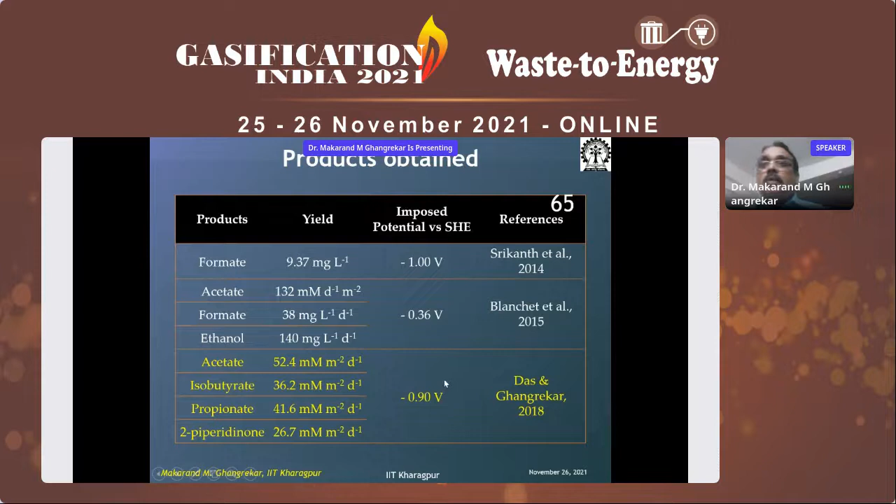When we operated a lab scale reactor, we could get acetate. These are results also reported by other researchers. In our lab, we could get acetate, isobutyrate, propionate, and piperidinone. These are compounds we could obtain when we impose 0.9 volt potential on the cathode, and these results are available in the public domain.

Then we scaled it up to 12.6 liter capacity, very near to the UASB reactor, where we continuously fed a small fraction of biogas through the gas line. Using different imposed potentials, we could reach up to 400 milligram per liter concentration of acetate production. So the biogas was getting reformed, enriched from 60% to 70% methane content at the outlet, and the carbon dioxide was converted into acetate.

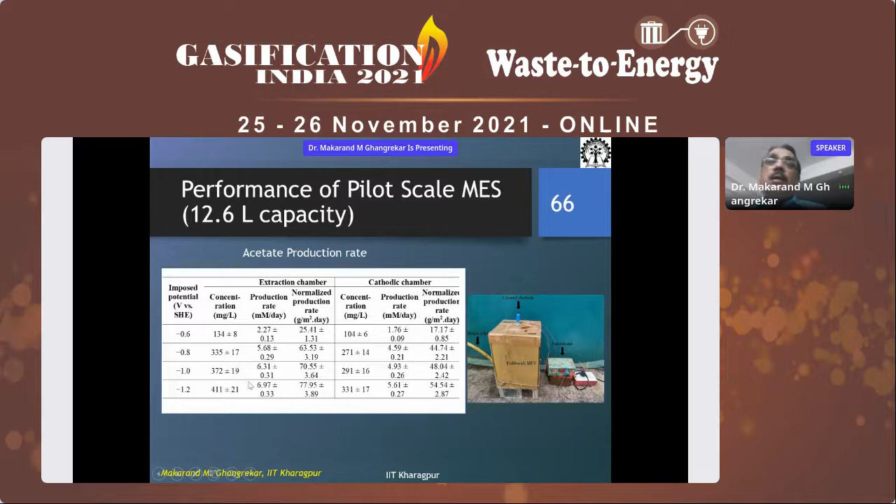Even scientists have reported ethanol production from this device. So acetate, butyrate, isobutyrate, ethanol - all of these can be produced.

We are working to optimize the 0.3 and 1.35 MLD sewage treatment plants. We've identified scope to reduce both operation cost and capital cost. We are looking forward to translating results from the two full-scale plants into operating guidelines, which we have already prepared, and are enthusiastic to replicate elsewhere for the benefit of society.

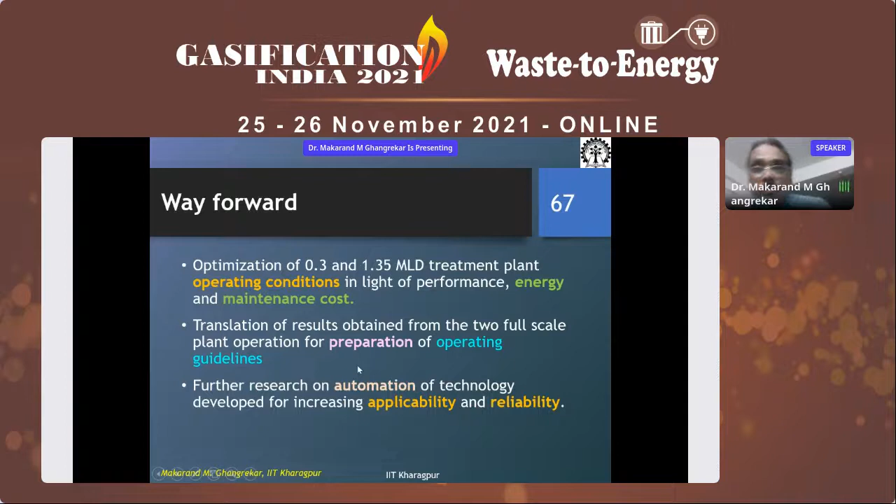Further research is on automation of this technology - remotely controlled systems and real-time monitoring systems. This is the research we are presently engaged with, so that assured quality treated water at any given time could be supplied to the individual.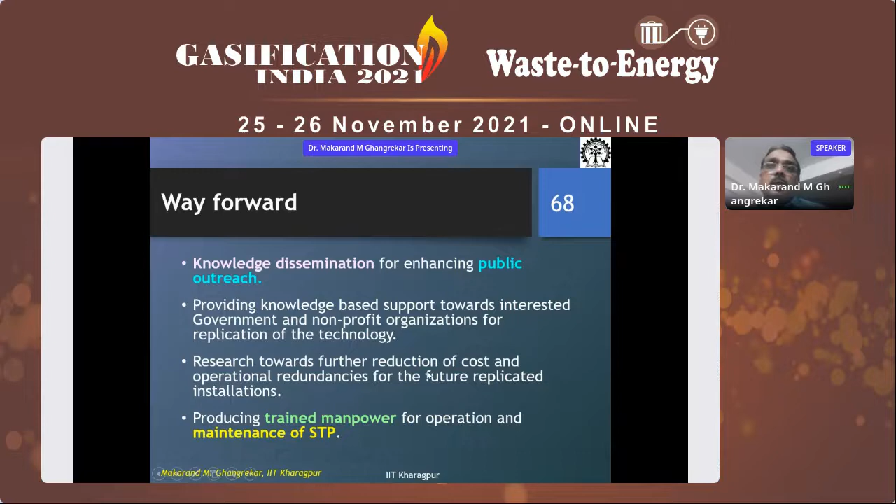We're also looking forward to knowledge dissemination, enhancing public outreach, and providing knowledge-based support to interested government and non-profit organizations. We would like to undertake further research to reduce cost and operational redundancies for future applications, and producing trained manpower for operation and maintenance of STPs in general.

This is our research group, the set of young people who worked hard to make this presentation possible for you. All credit goes to them for the data they generated.

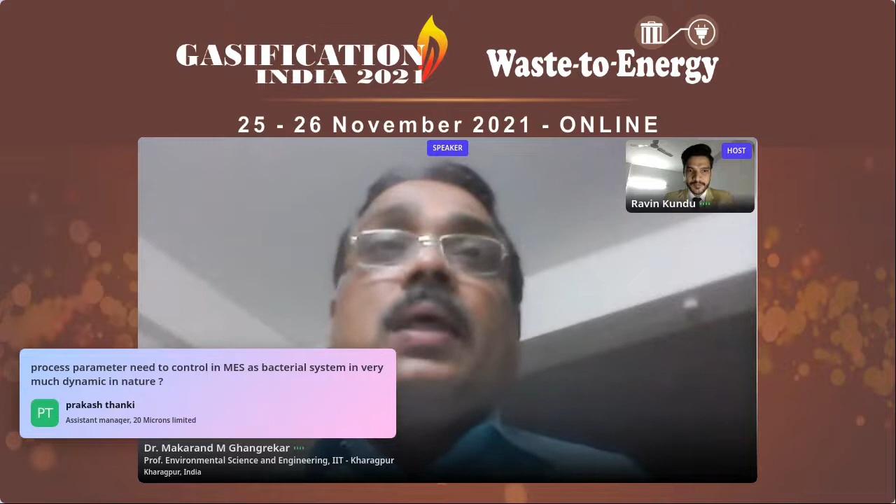There is a comment asking how to control the process parameters. Definitely, when we use pure culture, we get much better results. But this is a question from Mr. Prakash Thanki - in reality, maintaining a pure culture would be impossible. It's bound to get contaminated while exposed to the real environment. So the best strategy I recommend is bio-augmentation. Instead of relying on a pure culture, have a mixed culture which is augmented with electrogenic bacteria. This way we can get much better results.

My lab, as well as other scientists working in this area, have reported about 40 to 50%, or even 60-70% energy conversion efficiency. But to be frank, in my configuration, we got about 45% energy conversion efficiency in a lab scale 2-liter reactor. When I scaled up the same reactor to 700 liter or 1500 liter, the energy capture goes down to 6 to 7% because of electrochemistry limitations. The material we are using is not capable of handling that much current density. So this is where we need composite materials capable of handling more than 5 ampere per centimeter square of current density. This is where I'm struggling - I'm not finding a suitable material. Normal carbon material that we use cannot handle this level of current density, and that is why the energy capture is less. I hope I'm able to address the question.

Thank you, sir. There's an add-on question from Prakash ji: what could be the reason India is not able to install anaerobic digestion systems more widely?

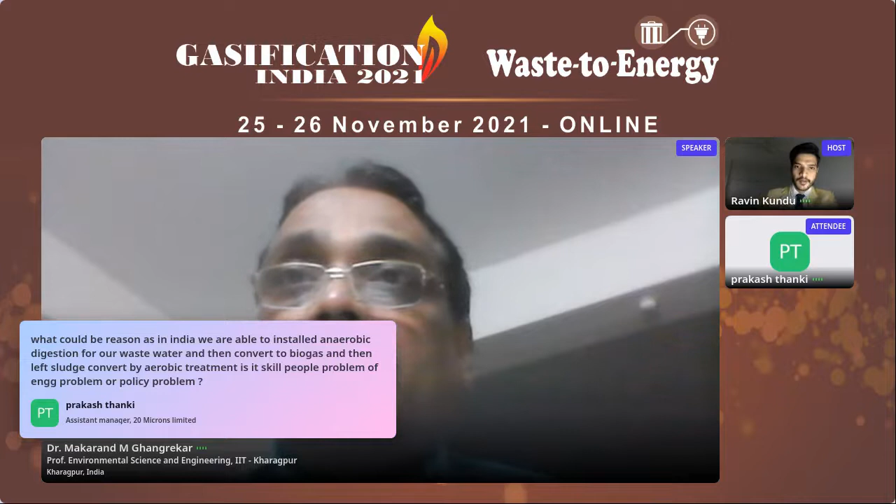Thank you very much, sir, for presenting it. Actually, it was a typing error - my question is what could be the reason India is not able to install that much anaerobic digestion in sewage treatment as well as different wastewater treatments? Because the main problem, as you rightly guided us, is that instead of putting energy to supply oxygen to bacteria which then converts material into carbon dioxide, we should first convert into energy, and then that energy should be used so the leftover organic material gets converted into aerobic products.

Absolutely, but in some places the municipal wastewater also receives, for example, tannery wastewater. Depending on the component, if it is sulfate-enriched wastewater, then anaerobic treatment may not be the good choice, because during the anaerobic process, sulfate gets converted into sulfide, and the oxygen demand problem still persists - the effluent of the anaerobic reactor will still have oxygen demand. So I would not recommend such high sulfate-bearing wastewater for anaerobic process, though I myself am an IWA member promoting anaerobic digesters in South Asian countries. But such wastewater is not suitable. Normal municipal wastewater has sulfate content around 80 to 100 milligram per liter, whereas COD is 300 milligram per liter - there I would recommend anaerobic digester. But not for wastewater like in Kanpur where we have around 500 milligram per liter sulfate with similar magnitude COD - there it may not be the best choice.